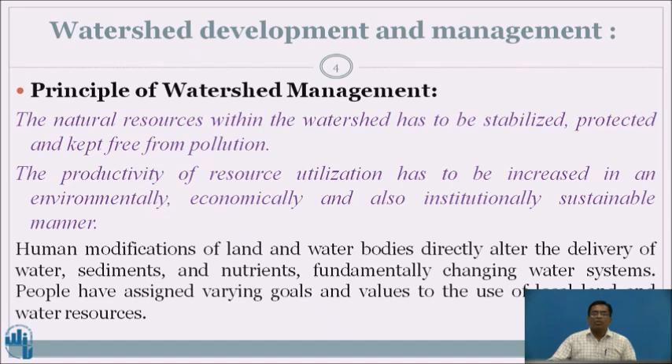Human modifications of land and water bodies directly alter delivery of water, sediments and nutrients, fundamentally changing their water systems. People have to assign varying goals and values for the use of such water resources.

Watershed management is a framework for integrated decision making where we try to assess the nature and status of the watershed ecosystems, define short-term and long-term goals for the system, determine objectives and actions needed to achieve selected goals, assess both benefits and costs of each action, implement desired actions, evaluate the effects, actions and progress towards the goals, and re-evaluate goals and objectives as a part of an iterative process.

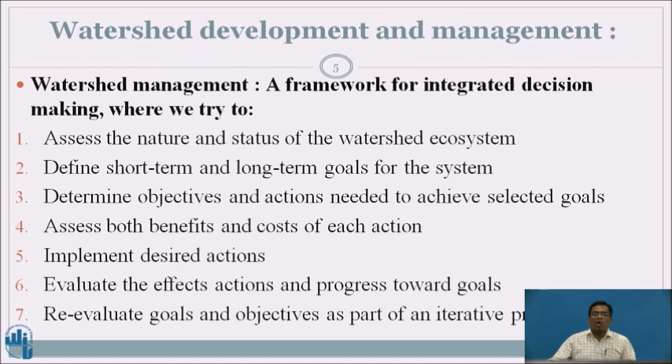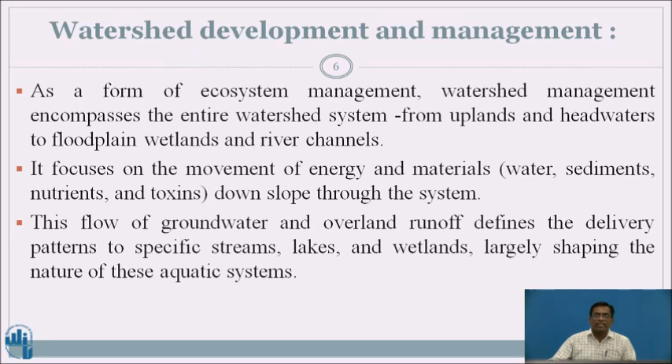As a form of ecosystem management, watershed management encompasses the entire watershed system from uplands and headwaters to floodplain wetlands and river channels. It focuses on the movement of energy and materials, for example water, sediments, nutrients and toxins, downslope through the system. This flow of groundwater and overland runoff defines the delivery patterns to specific streams, lakes, wetlands, largely shaping the nature of these aquatic systems.

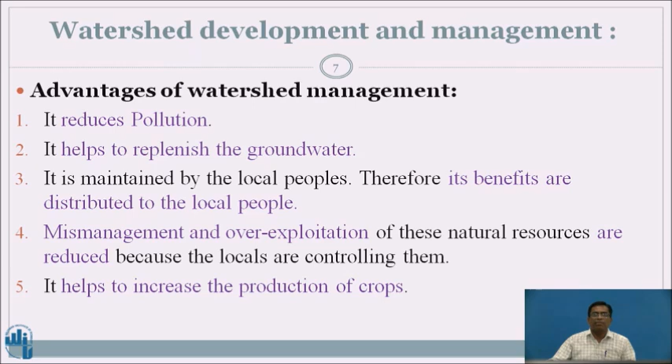Advantages of watershed management. It reduces pollution. It helps to replenish the groundwater. It is maintained by the local people, therefore its benefits are distributed to the local people only. Mismanagement and overexploitation of these natural resources are reduced because the locals are controlling them. It helps to increase the production of crops.

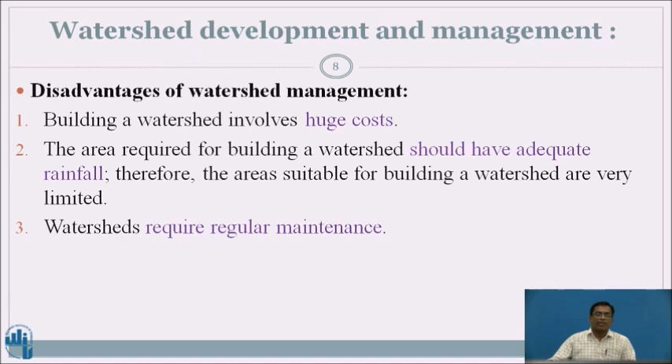Disadvantages of watershed management. Building a watershed involves huge costs. The area required for building a watershed should have adequate rainfall. Therefore, the areas suitable for building a watershed are very limited. Watersheds require regular maintenance.

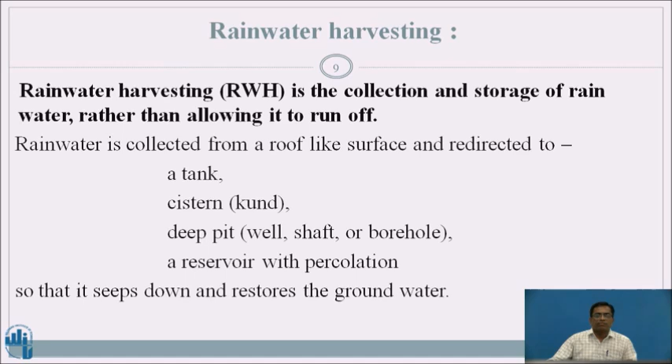Rainwater harvesting, RWH. Rainwater harvesting is the collection and storage of rainwater rather than allowing it to run off. If we see today's scenario, it is very necessary for us to store the rainwater and reuse such rainwater. So we are collecting the rainwater from roof-like surfaces and redirecting it to a tank, cistern, also known as kund, deep pit, that is well, shaft or boreholes, etc., or a reservoir with percolation so that it seeps down and restores the groundwater.

Rainwater harvesting essentially means collecting rainwater on the roofs of buildings and storing it underground for later use. So what is the need of this? It is needed to stop the decrease in groundwater level and to conserve surface water runoff during the rainy season. It recharges groundwater and arrests groundwater depletion. It also raises the declining water table and can help in increasing the water supply.

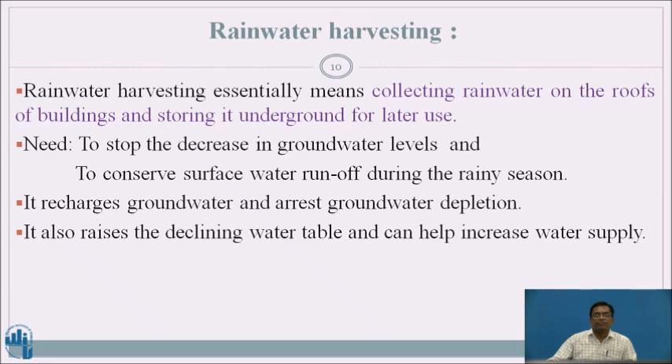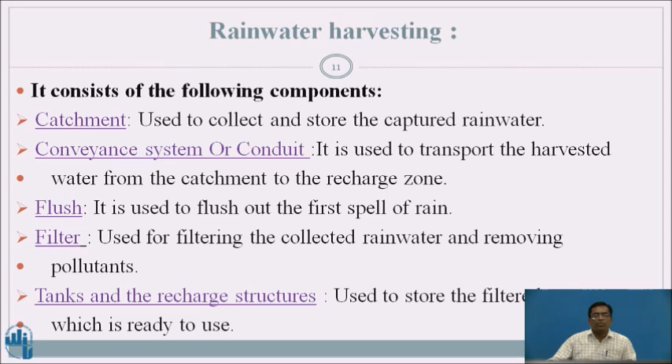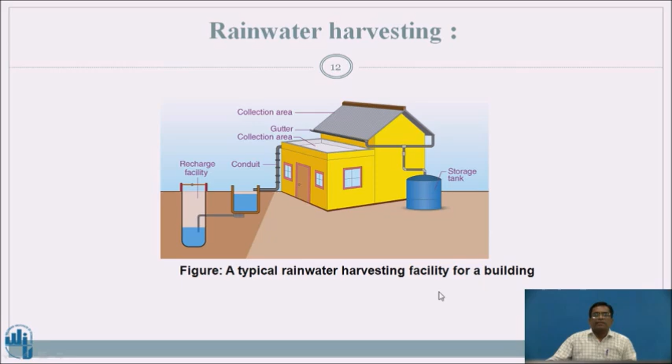So what are the factors that play a vital role in water harvesting? First, the quantum of runoff. Second, features of the catchment. Third, impact on the environment. Fourth, availability of the technology. Fifth, the capacity of the storage tanks. Sixth, types of roofs, their slopes and materials. Seventh, the frequency, quantity and quality of the rainfall. Eighth, the speed and ease with which the rainwater penetrates through the subsoil to recharge the groundwater.

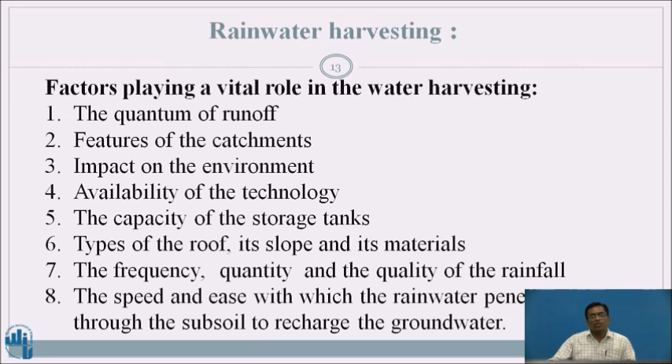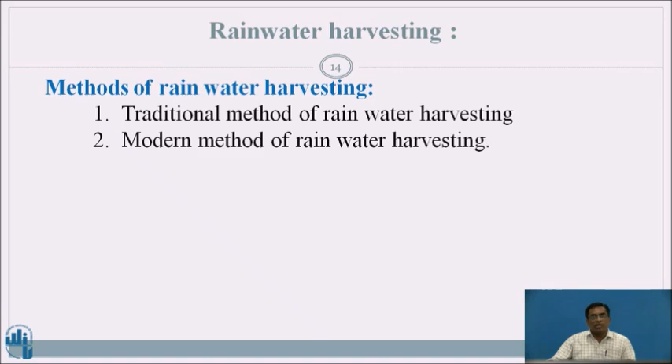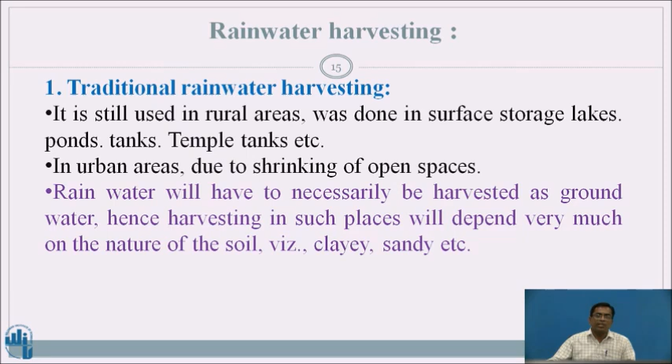So, methods of rainwater harvesting. There are two different methods. The first one is the traditional method of rainwater harvesting and the second one is the modern method of rainwater harvesting. First, the traditional method for rainwater harvesting. It is still used in rural areas, done in surface storage: lakes, ponds, tanks, temple tanks, etc. In urban areas, due to shrinking of open spaces, rainwater will necessarily have to be harvested as groundwater, hence harvesting in such places will depend very much on the nature of the soil, like clay, sandy, etc.

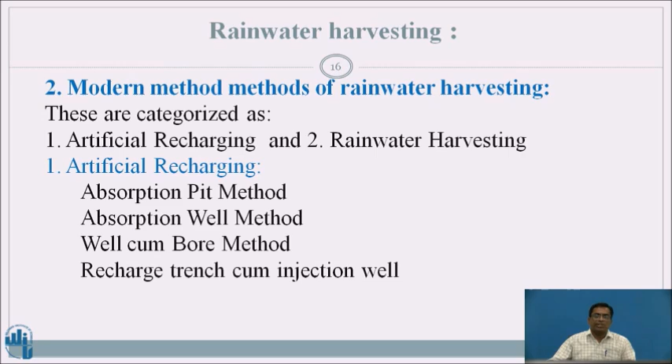Second, modern methods of rainwater harvesting. These are categorized as first, artificial recharging and second, rainwater harvesting. First, artificial recharging. It consists of the absorption pit method, absorption well method, well cum bore method, and recharge trench cum injection well. Rainwater harvesting: percolation pit method, bore well with settlement tank, open well method with filter bed sump, and percolation pit with bore method.

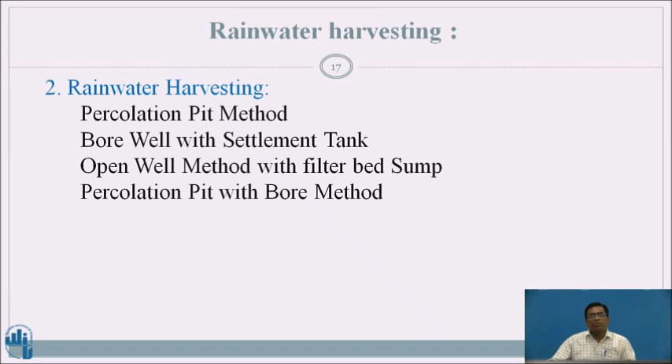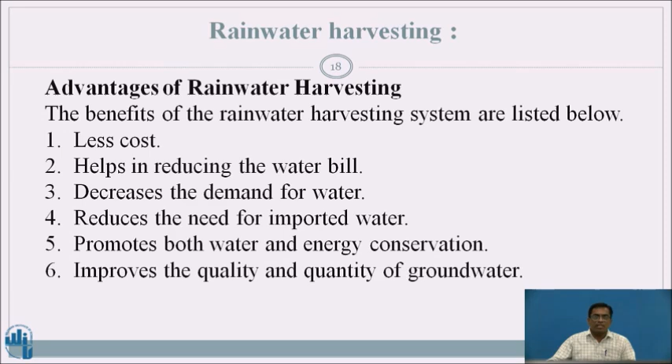So what are the advantages of rainwater harvesting? The benefits of rainwater harvesting systems are given below. First one, less cost. It costs less, helps in reducing the water bill, decreases the demand for water, and reduces the need for imported water. Fifth, it promotes both water and energy conservation. Sixth, it improves the quality and quantity of groundwater. Seventh, it does not require a filtration system for landscape irrigation. Eighth, this technology is relatively simple, easy to install and operate.

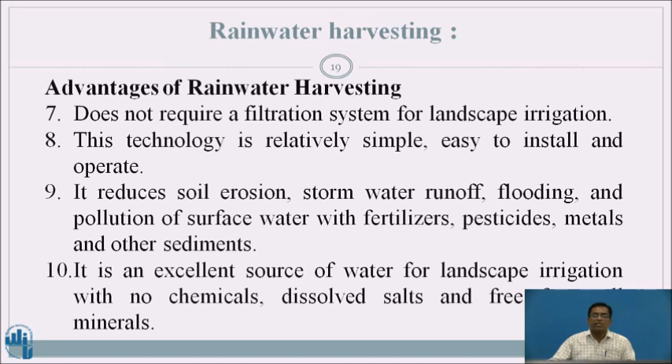Ninth, it reduces soil erosion, storm water runoff, flooding and pollution of surface water with fertilizers, pesticides, metals and other sediments. It is an excellent source of water for landscape irrigation with no chemicals, dissolved salts, or minerals.